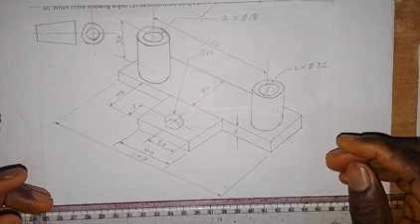In the question, we're asked to draw the orthographic views, but it is not stated in written whether we should draw the views in a particular type of orthographic projection, I mean first angle projection or third angle projection. But symbolically we have a symbol here that says the views should be drawn in first angle projection.

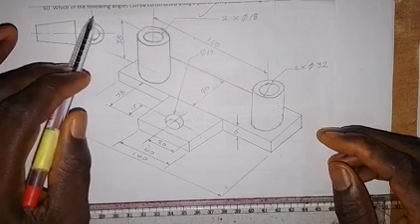So this symbol that we have here is a symbol of the first angle orthographic projection. Even if it is not stated in written that the views should be produced in first angle projection, when you see a symbol like this, it means the orthographic views are to be produced in first angle projection.

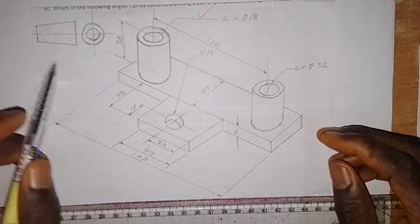That is what this symbol means here. Alright, so now for this object that we have here, we are asked to draw the front elevation in this direction. So we have an arrow, arrow X or Y here, I can't remember that. I have the soft copy on my laptop, but I couldn't get the print out, so that's why I made a sketch of the object on this paper.

So we are looking at the object in this direction. This is the front view. When we are looking at it in this direction, we are going to see this rectangle, and we see this rectangle. Then this cylindrical part will give us a rectangle as the front elevation, with this hole hidden within it.

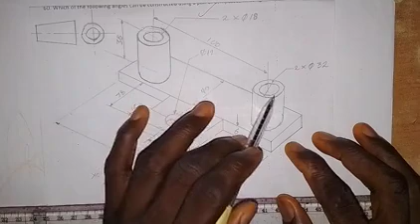The same thing applies to this. So what we are going to produce as the front elevation are these three rectangles, this rectangle, this rectangle, this rectangle. All three of them will lie on the same surface. We'll see the way I'm going to do it.

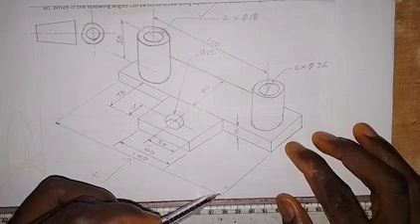Then we have a rectangle up here, we have a rectangle up here. So let me talk about the dimensions that we have here. The total distance from here to here is 140 millimeters. Then the distance from here to here is 40 millimeters.

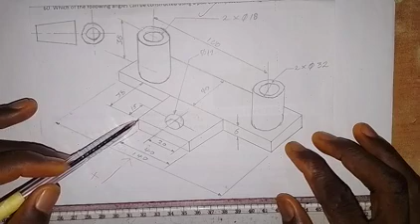And then we have that the center of this hole is 20 millimeters away from this end. And then we also have that the center of this hole from this end is 15 millimeters.

Okay, and then the distance from here to here is 38 millimeters, while the thickness from here to here is 40 millimeters. Then the height of this cylinder is 38, and the center of this hole, from the center of this hole here in the cylinders, is 100 millimeters.

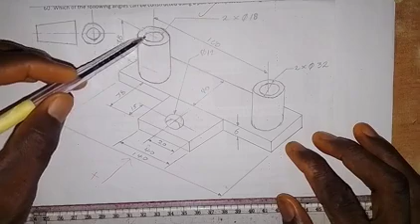So the diameter of this small hole, or this small circle, is 18 millimeters. The same applies to this one, while for the outer one the diameter is 32. And for this hole that we have here, the diameter is 19 millimeters, and the thickness from here to here is 6 millimeters. It applies to this also, and it also applies to this.

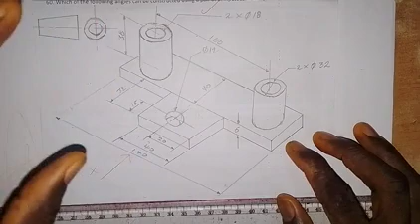So we are going to make use of all these dimensions to produce the orthographic views of this object in first angle projection. We draw the front elevation, we have a video for that. We draw the plan, we have a video for that. We draw the end elevations, the right end elevation and left end elevation. We have a video for each of them so the work will not be too cumbersome. Okay, so let's start and see how it goes.

So we are to draw the front elevation first. We are going to draw a horizontal line, all through this page. Then we take a set square, I'm making use of my small set square to do this work. Then here we are going to draw a vertical line down here like this.

Then I'll be taking a measurement of 140 millimeters, which is the total length. So I'll take 140 millimeters here. So this is 140 millimeters.

Then the midpoint, if I divide 140 by 2, that is 70. So we have the midpoint there. I got this midpoint because of the hole that we have in the middle of the surface. So I'm going to draw a vertical center line here like this.

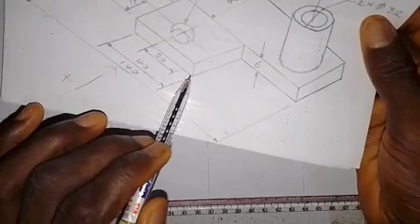Alright, so at this point also I'm going to draw a vertical line. Okay, so this vertical line that we have here. Then the next thing that I'm going to do is take a measurement of 6 millimeters, which is the thickness here. So from here to here is 6 millimeters. So the thickness of the three parts, these three rectangles, is 6 millimeters.

So I'll take a measurement of 6 millimeters here. So this is 6 millimeters. Okay, so then I'm going to draw a horizontal line. The horizontal line will cut across the whole of this part here. The reason why we did this is that we are going to draw both the right and left hand elevation. So let me change this red pen.

Okay, so the next thing I'm going to do is take out this rectangle. If I take out this rectangle here in the middle, this one will come out. This is what I mean. So the length of this rectangle is 40 millimeters. So from this center line that we have here, I will take 20 millimeters to the left side and 20 millimeters to the right side, and that gives me 40 millimeters.

So what I will do here is draw a vertical line from here down, because of the plan that we are going to draw, and here also I will draw a vertical line down like this. Looking at what we have here, we already have the three rectangles all laid on this surface. So all I need to do now is to make it more visible.

So I'll make this a thick line like this, and then I'll come up here and make this a thick line for the three rectangles that we see on that face. Then we have the middle rectangle like this, and then this end, we make it a thick line, and coming to this end, we also have a thick line.

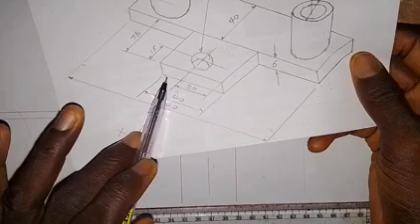Now, part of what we have on this surface is this hole, and this hole on the front elevation will be hidden from us. So to show that there is a hole within this part, the diameter is 12, so I will come to the midpoint here and take 6 millimeters to the left side and 6 millimeters to the right side, making 12.

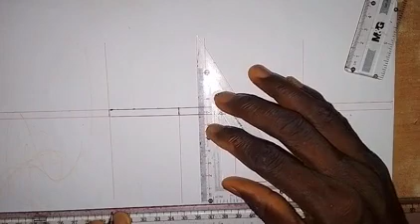So now we are going to show that there is a hole here. The hole will be hidden from us in the front elevation, so just draw short dashed lines like this. So we have shown there that there is a hole within that part. Now we are done with this base. This rectangle is here, this rectangle is here, and this rectangle is here.

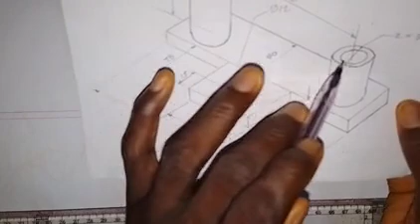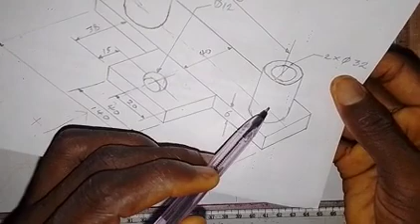Now we have to show the cylindrical part. So if I draw a horizontal center line here, as we have here, this is the center here also. From here to here is 100 millimeters, and that means I need to locate the center here. So I have to take 20 millimeters from here to here.

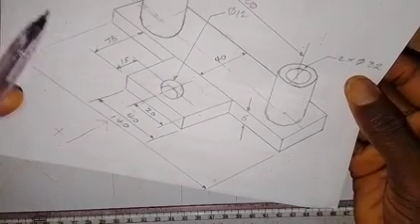Okay, so because if we subtract 100 from 140, it will remain 40. So it means that the center of this circular base of the cylinder is 20 millimeters away from this end and 20 millimeters away from this end. That is what we have there. I believe you can see what I'm talking about.

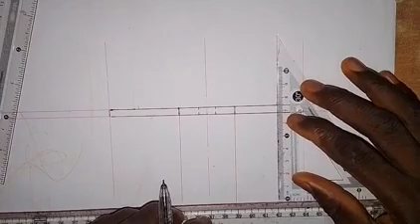So what I'm going to do now is that I will take 20 millimeters coming up here. So take 20 millimeters here. Okay, then coming to this end here, I will take 20 millimeters here. So I'm going to draw a vertical center line. So here I will draw a vertical center line like this. Okay, I'm coming to this end also, to this center. So I will draw a vertical center line like this. Alright, so we have this.

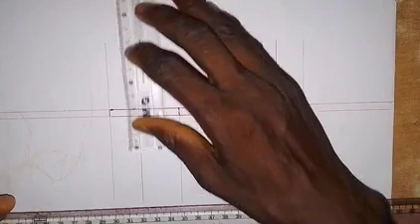So the next thing that I'm going to do is that the height of the cylinder is 38 millimeters from the base. So I will take a measurement of 38 millimeters here. So this is 38 millimeters. Okay, then I'm going to draw a horizontal line. So from here, take the horizontal line to this side.

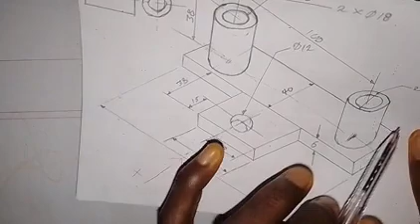Okay, so the next thing is that the diameter of the outer part of the cylinder, that is this big circle here, is 32 millimeters. We have 2 times diameter 32, so we have diameter to be 32. So 32 by 2, that will give us 16. So I will take a measurement of 16 millimeters to the right side and 16 millimeters to the left side. So this is 16, 16. So 16 to the right, 16 to the left. So I will come here also and do the same thing. So 16 millimeters to this side and 16 millimeters to this side, making 32.

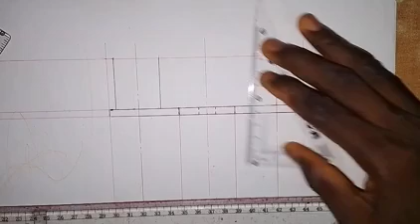So here I will now draw a vertical line. This vertical line, I'm going to make it a thick line at once, so that I will not be doing that again. Okay, I don't have to take it down. So we come here again, and we draw a vertical line for the outer part. So coming here, I will draw a vertical line, making it a thick line so that we can be able to see it. And I'll also do the same thing here on this side, so this is it. Okay, then for the upper part, make it a thick line like this. Okay, so we also make this a thick line. So we have it like this.

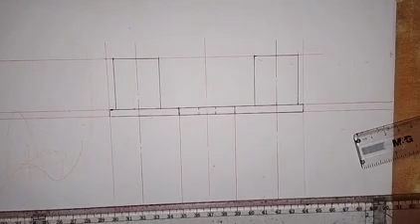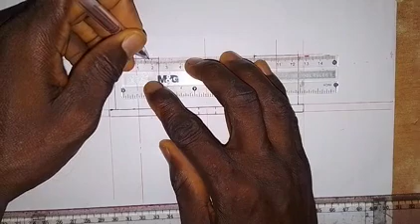All right, so then what about the inner circle? The inner circle will be hidden from us on the front elevation. And the diameter of that is 18 millimeters. So we divide 18 by 2, and that will give us 9. So from the midpoint, we take 9 millimeters to the left side and 9 millimeters to the right side, making 18. Okay, then we also do the same thing here on this side, 9 millimeters to the left side and 9 millimeters to the right side, making 18 millimeters.

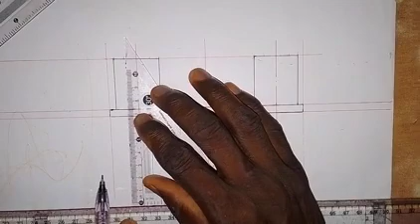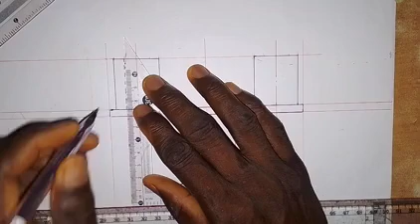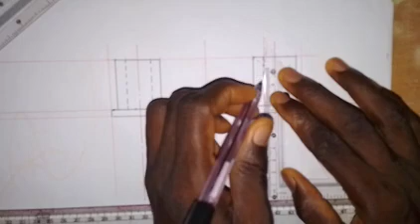So it is hidden from us, so we are going to draw with short dashes line. So you see the way I'm going to do it. Just put dash, dash, dash, dash. And then you do the same thing on this side. Okay, then coming here, we do the same thing. So produce dash lines down like this. Okay, then we come here and do the same thing.

Alright, this is the front elevation. So we are done with the front elevation.